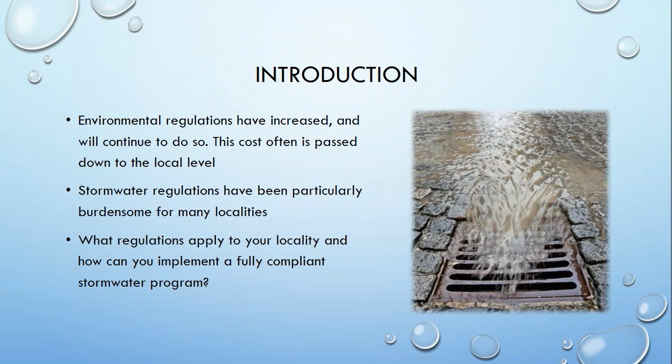So some other discussion topics: we're going to do a high level, 30,000 foot overview of what stormwater is and why we're here. We'll go down into the weeds a little further and talk about the Virginia Stormwater Management Program itself, and then the local VSMP authority requirements that accompany that. We'll spend some time talking about MS4 localities.

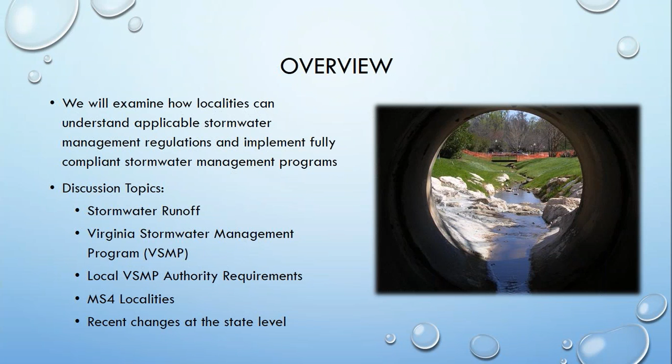MS4 is the Municipal Separate Storm Sewer System, so one M, four S's, and that applies to certain localities, usually based on population. And then we will wrap it up with some of the changes that we're seeing at the state level and some of the challenges that we're facing as we move forward with stormwater management in the state of Virginia.

So what is stormwater runoff? We probably know that the rain falls from the sky, it hits the ground, some of it's absorbed, and what isn't absorbed flows over the ground surface and ends up in our creeks, streams, rivers, lakes, and other waterways that are considered waters of the state, eventually getting to the Chesapeake Bay for most of Virginia, not all of it, and then into the ocean.

So when the runoff does occur and it cannot be absorbed in the ground, we have stormwater runoff that flows over the land, and as it does so, it picks up anything in its way. That includes sediment, sometimes trash, and a variety of pollutants, pet waste, oils, fertilizer, and anything else that may be on the ground, and then carried into the waterways.

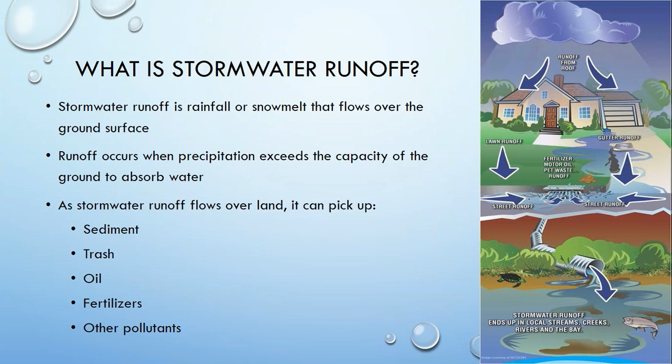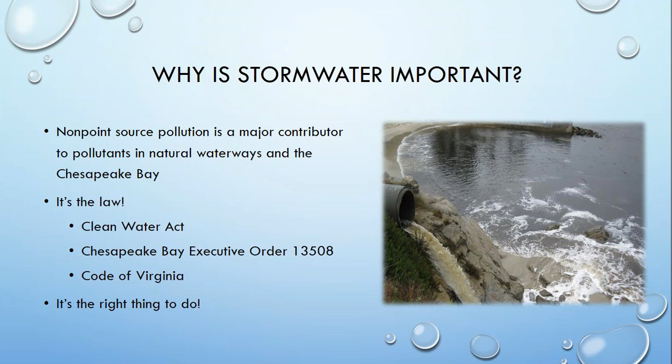The Clean Water Act is in effect. The Chesapeake Bay Executive Order 13508 is in effect, and it is a very significant portion of sections in the Code of Virginia. And then, of course, it's the right thing to do. We want to be good stewards of our environment and leave the world a better place for the next generation. It's important that we are taking care of the resources that we have. And development makes a big impact to that, and that is one of the things we will be spending a fair amount of time talking about today.

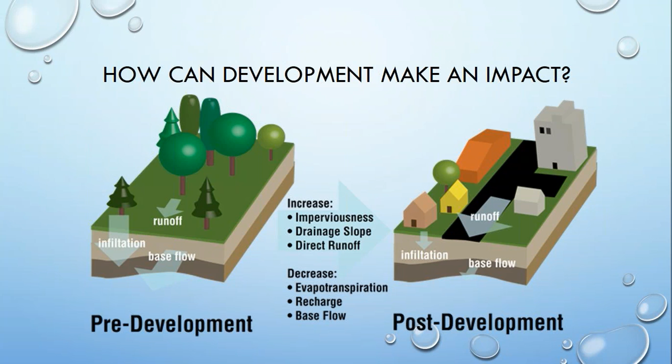I'm going to turn it over to Shana now, and she's going to discuss a little bit about the Virginia Stormwater Management Program. Within Virginia, stormwater is regulated under the Virginia Stormwater Management Program, and the Virginia Department of Environmental Quality is the lead agency that is responsible for developing the statewide stormwater management control programs, and additionally overseeing the implementation of these individual stormwater programs to ensure that they comply with the Stormwater Management Act and the associated Virginia Stormwater Management Program regulations.

And so the overarching goal of this Virginia Stormwater Management Program is focused on ensuring the general health, safety, and welfare of the citizens of the Commonwealth, while also seeking to protect both the quality and quantity of the state's waters from the harm that can result from unmanaged stormwater. And the VSMP program manages stormwater during three critical phases of development.

First, within the pre-construction phase, this is when stormwater management plans are prepared and reviewed to ensure that they meet the technical criteria for water quality and quantity within the stormwater regulations to protect the state surface waters. Additionally, moving into construction is when the erosion and sediment controls and various pollution prevention practices are implemented and routinely inspected and evaluated to ensure that the construction activity is not discharging pollutants to waterways.

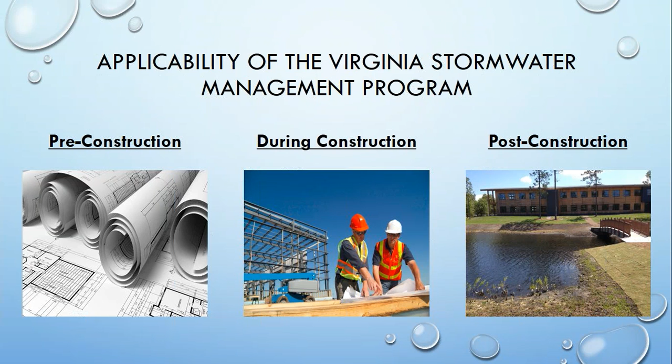Under the VSMP regulations, they set forth water quality and water quantity technical criteria. The water quality criteria establishes that it reduces pollutants carried offsite in stormwater and also sets the threshold for total phosphorus that is allowed to leave in post-construction runoff. And in order to demonstrate compliance with the water quality technical criteria, the applicants are required to use the Virginia

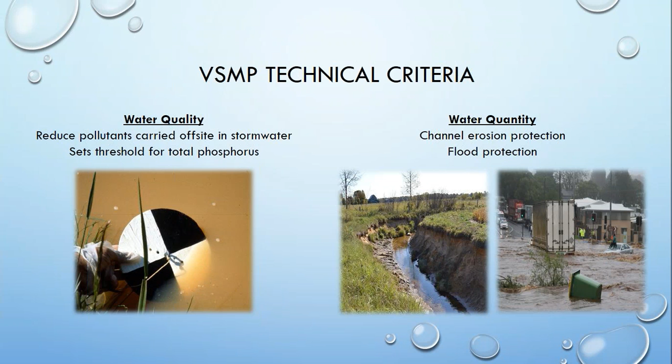runoff reduction method. Additionally, there are criteria for water quantity, and this focuses on ensuring that post-construction runoff peak discharges do not exceed pre-construction peak discharges. And this is to protect the surface waters from channel erosion and also from flooding. And in order to demonstrate compliance with this, stormwater management plans must use the energy balance method and apply the flood protection criterion.

The impact of development can be mitigated through environmental site design and the use of best management practices. Environmental site design uses small-scale stormwater management practices, non-structural techniques, and better site planning to mimic the natural runoff characteristics and minimize the impact on water quality and quantity. Environmental site design focuses on promoting conservation of natural features such as drainage patterns, natural or native soil and vegetation. It also minimizes impervious surfaces, and then implements different practices to help slow down runoff and increase infiltration and evapotranspiration.

Additionally, if a site does not initially meet the technical criteria in the Virginia Stormwater Management Program regulations, the regulations allow for the use of best management practices, and the standards and specifications for these can be found on the Virginia Stormwater BMP Clearinghouse website. These include the 15 non-proprietary BMPs, such as bioretention facilities, permeable pavement, and then they also include some of the proprietary BMPs that have been approved by the Department of Environmental Quality.

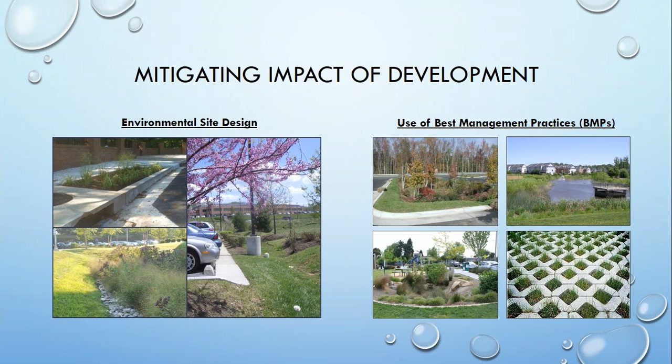So some localities are required to adopt a VSMP, while other entities and localities may choose whether or not they want to adopt the VSMP program. Localities that must adopt a VSMP include those that operate regulated municipal separate storm sewer systems, while non-MS4 localities can choose whether or not they want to adopt a VSMP, as well as state entities, federal entities, and linear projects that are subject to annual standards and specifications.

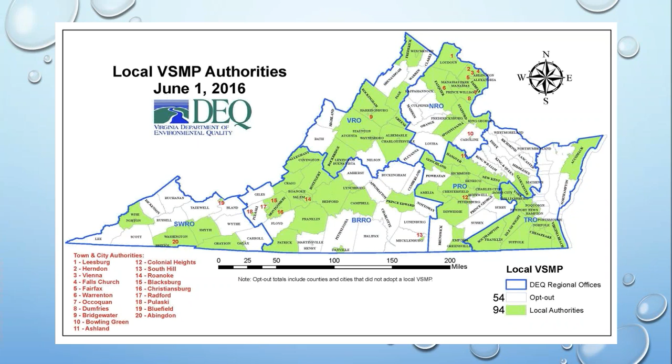The VSMP regulations apply to certain land disturbing activities, and these are land disturbing activities that are greater than or equal to 1 acre, part of a larger plan of development or sale that is greater than or equal to 1 acre, greater than or equal to 2,500 square feet within a locality that has been designated as a Chesapeake Bay preservation area, and then finally a more stringent area that is required by a local ordinance.

And then under the Stormwater Management Act, localities are allowed to implement more stringent stormwater management ordinances, provided that they are based on comprehensive watershed management studies and findings, or determined by the locality to be necessary to address TMDL requirements, prevent further degradation to water resources, address specific pollution concerns, or protect exceptional state waters.

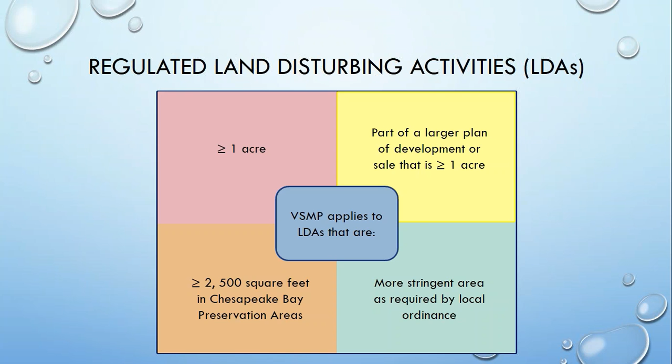And within Virginia, there are 84 localities that are subject to the Chesapeake Bay Act. This applies to localities within Tidewater, Virginia, and includes most of the localities that are east of I-95. One of the major provisions of the Chesapeake Bay Act and regulations is that it requires localities to regulate land disturbing activities that are greater than or equal to 2,500 square feet under an erosion and sediment control and stormwater management program. And so if a locality is designated as a Chesapeake Bay preservation area, it must still regulate land disturbing activities between 2,500 square feet and 1 acre, even if it has not adopted a VSMP program.

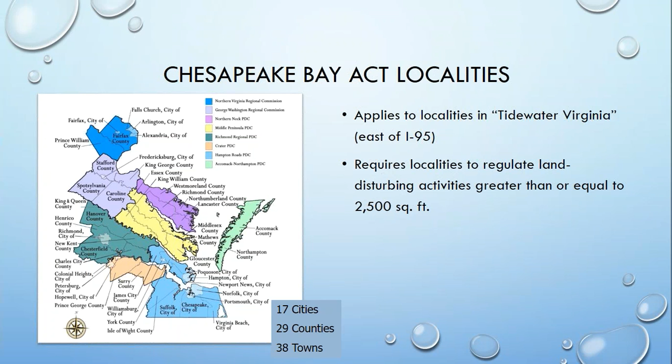So this creates a little bit of a burden for some of the localities in rural Virginia that have opted out of administering a VSMP, because they will still have to perform stormwater management review for activities between 2,500 square feet and 1 acre.

So now we're going to talk just a little bit about administering the VSMP. As Shana had mentioned, there are some localities that have opted out, there are some that have opted in, but we're going to talk a little bit about those that are responsible for administering the VSMP. And beginning July 1st of 2014, all MS4 localities were required to adopt and administer the VSMP, as Shana had mentioned earlier. Non-MS4 localities could elect to adopt a VSMP or have DEQ administer the program. So we're going to focus really on those localities that are administering it themselves.

The locality's program administrator is responsible for administering the VSMP, which includes compliance with local ordinances, and the state has set forth criteria for what needs to be included in those local ordinances, and that sometimes includes things such as accepting registration statements, plan reviews and what that entails, enforcement procedures, and sets forth criminal and civil penalties for not adhering to the stormwater regulations and codes.

The program administrator must also be responsible for permit issuance, construction inspections and enforcement, permit closeout, post-construction inspections, and then retaining the records for those files and those inspections and projects. It's also important to note that VSMP staff have and maintain the required certifications that are required by the state in order to run the VSMP.

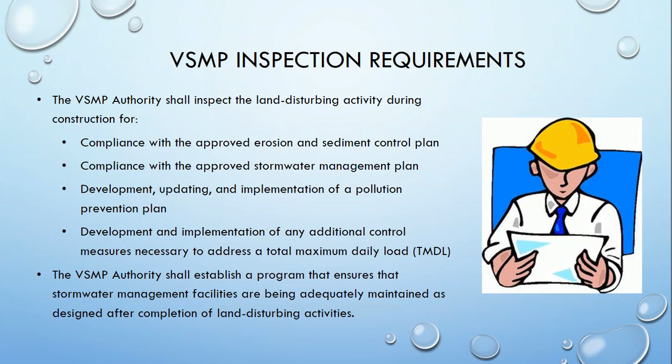So let's talk just a little bit about the review process. Like some of our review processes are, it is a little bit lengthy. So the Stormwater Management Plan is submitted by the applicant to the VSMP authority, and we'll just consider that to be a locality for now. So the locality would have 15 days to determine the completeness and then notify the applicant if it is complete. If it is not, then obviously the plan does not move forward and the Stormwater Management Plan must be resubmitted to meet the completeness requirements.

Once it is complete and been accepted for review, from that cursory review, the locality or the VSMP authority has 60 days from that notification to notify the applicant in writing of any comments and note any deficiencies that may be in the plan. If it doesn't meet those requirements and has to be resubmitted, then the VSMP has 45 days from the date of the resubmission to review and then accordingly respond to the applicant of the nature of any comments to address deficiencies in the plan.

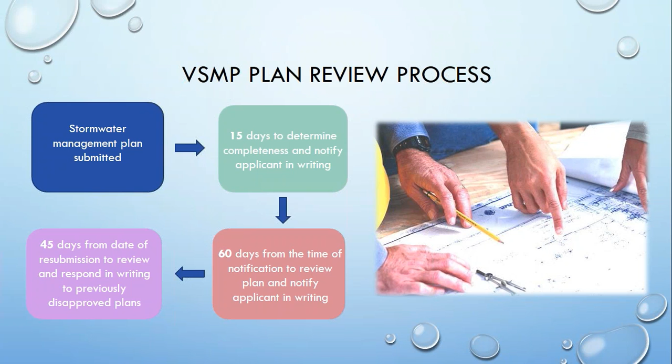Documentation. It's very important that the locality or the VSMP authority have good record keeping to ensure that documents are kept, and there are requirements for that. Project records must be kept for at least 3 years after the state permit is terminated or the project is completed. The stormwater management facility inspection records need to be kept for at least 5 years from the date of inspection. And it's always good, for many reasons, to keep your construction and as-built record drawings maintained in perpetuity, but that is a requirement of the VSMP, or at least until the facility is removed.

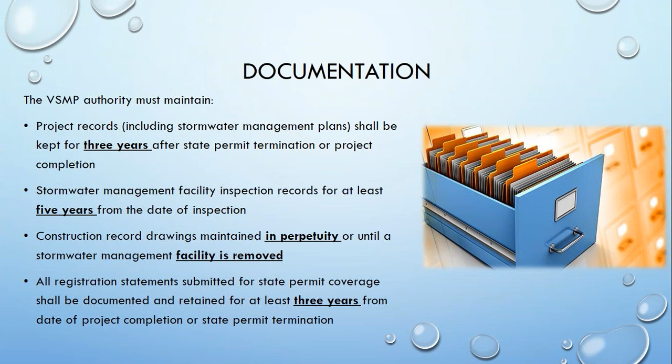So it's always good practice, just a good best management practice, to retain and keep any construction record drawings for any facility in a good filing system. And then all registration statements submitted for state permit coverage need to be documented and retained for at least 3 years. So there's a few nuances here, and it's just good to remember which ones need to be kept for how long, and try to ensure that you have a good filing system so that when you win the lottery and you are no longer employed there, whoever steps in behind you can have a fairly good and easily understood method for how things are filed and stored.

And so reporting requirements: October 1st is usually the big day to get things to DEQ for both MS4s and VSMPs, and that certainly is true here. What the state is looking for from VSMP authorities is to submit information from the previous fiscal year. So for instance, October 1st coming up this year, 2016, they would be looking for information beginning on July 1st of 2015 to June 30th of 2016.

And they would be looking for information on new permanent management facilities that have been installed during that time frame. They would like to know the type of facility, where it is located geographically, the coordinates, the acres treated, and then the surface waters or karst features into which the facility will discharge. They also would like to know if there were any enforcement actions taken during that fiscal year, and follow-up associated with that, and any number of exceptions that might have been granted by the VSMP authority.

And now Shana will talk a little bit about the MS4. So first off, what exactly is an MS4? MS4 stands for Municipal Separate Storm Sewer System, and this is the system that is designed for collecting or conveying stormwater that is owned by a public body and is not part of a combined sewer or publicly owned treatment works. And within Virginia, discharges from MS4s are regulated under the Virginia Stormwater Management Act, the Virginia Stormwater Management Program Permit Regulations, and then also the Federal Clean Water Act.

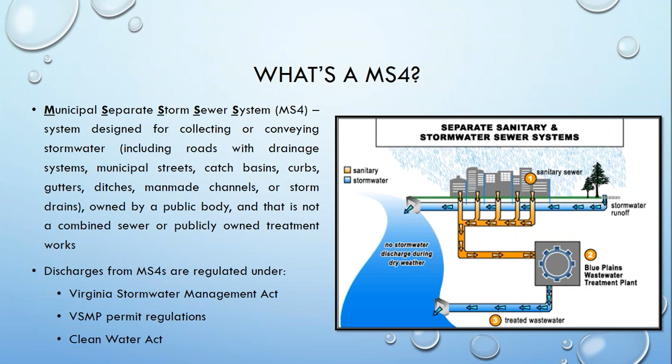MS4 regulations were developed and implemented in 2 phases. The first phase began in the early 1990s, and this required operators of MS4s that served populations greater than 100,000 people per the 1990 decennial census to maintain a permit to discharge stormwater, and these are regulated under individual state stormwater permits. Phase 2 began in 2003, and this applied to operators of small MS4s that were identified as being within urbanized areas by the latest decennial census.

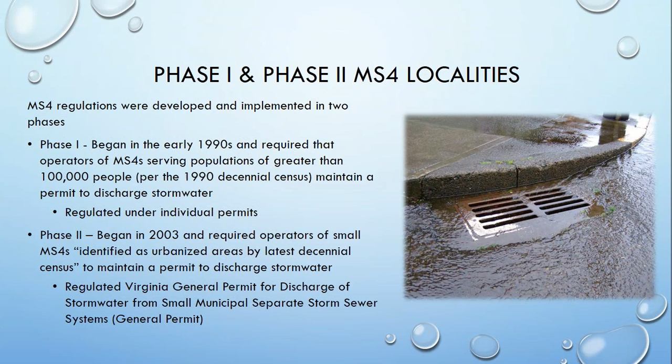And under this classification, small MS4s are required to be regulated by the Virginia General Permit for Discharge of Stormwater from Small Municipal Separate Storm Sewer Systems, known as the General Permit. The General Permit requires permittees to establish a comprehensive stormwater management plan to reduce pollutants to the maximum extent practicable. And this permit is issued and overseen by the Virginia Department of Environmental Quality, and it focuses primarily upon methodologies to reduce non-point source pollution to the maximum extent practicable.

Each MS4 permit lasts for a permit cycle of 5 years. The current permits became effective on July 1st, 2013, and will run through June 30th, 2018, when a new permit is likely to come into effect. In addition to establishing the different components and tasks that must be developed and implemented, the permit also establishes the timeline for developing the MS4 program.

There are also some reporting requirements. Permittees must submit a program plan and annual reports to DEQ. The program plan outlines the different best management practices that the locality will implement to meet the permit requirements over the 5-year permit cycle. And this program plan must be evaluated annually and updated as necessary to ensure that the permit requirements are being met.

Additionally, the permittee must submit annual reports to DEQ, which are due by October 1st each year. And these annual reports describe the activities that took place during the reporting year, also detail the activities that will take place during the following reporting year, and then finally include an evaluation of the different best management practices that the locality has implemented.

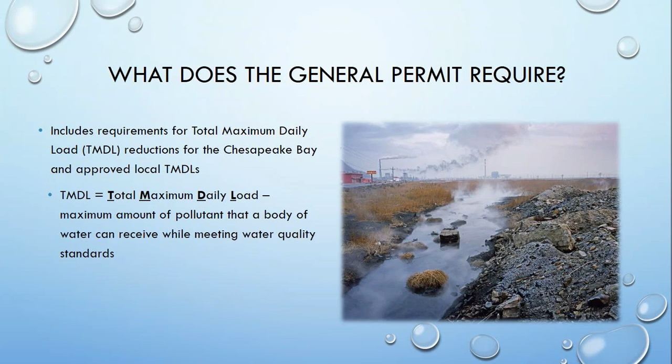The U.S. Environmental Protection Agency approved the Chesapeake Bay TMDL in 2010, and this TMDL focuses on the pollutants of concern, which are nitrogen, phosphorus, and sediment. Within Virginia, they've established the Watershed Implementation Plan that allows up to 3 MS4 permit cycles to meet the TMDL reduction requirements. So in this permit cycle, which currently runs from 2013 to 2018, permittees are required to attain a 5% reduction in nitrogen, phosphorus, and sediment loads.

In the next permit cycle, which will run from 2018 to 2023, permittees must meet an additional anticipated 35% reduction in these loads. And then finally, in the third permit cycle, which will run from 2023 to 2028, permittees must implement practices to meet an additional anticipated 20% reduction. So in total, over these 3 permit cycles, this is going to be a 60% reduction in a locality's nitrogen, phosphorus, and sediment loads.

So within the MS4 permit, they have the requirement for the permittee to develop an action plan to demonstrate how they will meet the pollutant reduction targets. So they will quantify their current loads and the required reductions, and then also detail the best management practices that they will implement to meet the reduction requirement for that permit cycle. And then additionally, the Phase 3 watershed implementation plan is currently in draft and is expected to come out in 2018, and this may result in some changes to the pollution reduction targets. So we might be seeing a change in the next permit.

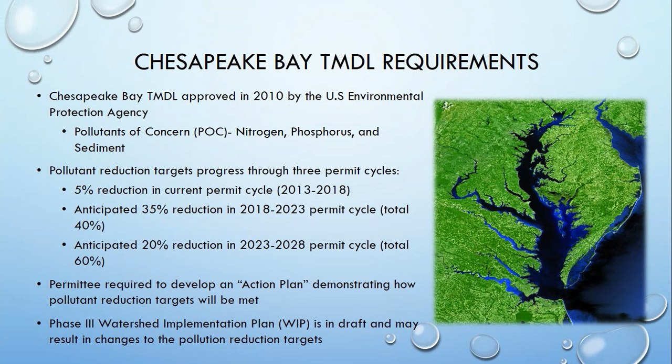The MS4 permit also requires a locality to develop action plans for applicable local TMDLs. The current permit requires these action plans to be developed if a locality has a waste load allocation for a TMDL that was approved before July 1st, 2013. Under this requirement, the permittee must evaluate the source of the pollutant and then develop and implement an action plan that details the best management practices to meet their assigned waste load allocation. And then finally, they must develop a process for evaluating whether or not the practices they implement will meet their assigned waste load allocations.

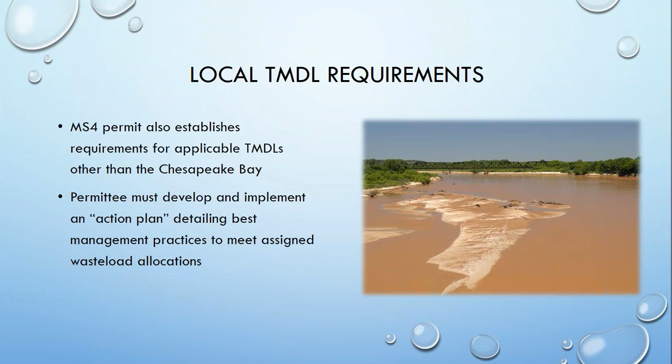Finally, the MS4 permit establishes 6 minimum control measures, which must be incorporated into the MS4 program. These include public education and outreach, public involvement and participation, illicit discharge detection and elimination, construction site stormwater runoff control, post-construction stormwater management, and finally pollution prevention and good housekeeping for municipal operations. Under each of these MCMs, there are various tasks and programs that must be implemented, such as public education outreach programs, employee training, and outfall screening. These have to be implemented into the permittee's MS4 program plan and continuously evaluated to ensure that the locality is meeting the requirements of the MS4 permit.

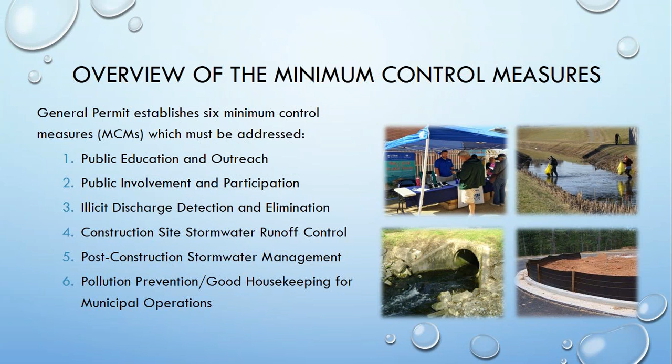All right, so we're going to talk a little bit about some of the challenges that we're facing here in local government. That's kind of what our background is. We work for a number of local governments throughout the Commonwealth, and that's what our background is when we were working for staff. So we're sensitive to the needs and the challenges that local governments are facing when it comes to both the VSMP and the MS4 programs. And we recognize that both are very complex and very expensive programs to administer, and with things facing us in future permit cycles, particularly for our MS4 partners and friends, those are some big challenges on the road ahead.

So many localities are obviously finding it difficult to create fully compliant stormwater management programs. Some localities simply do not have the resources to develop the programs and then administer them as they should be. There's a lot of stuff going on. We're all very busy, and it's very tough when you're in the trenches trying to put fires out all day working for local government wearing a million different hats, keeping your eye on the ball as best as we can and trying to make sure we're meeting these requirements and deadlines that the state has set forth. So it's a resource challenge from a time standpoint, but also from a financial standpoint, not having the staff positions available for many partners to really dedicate time to focusing on stormwater management programs from the administration perspective.

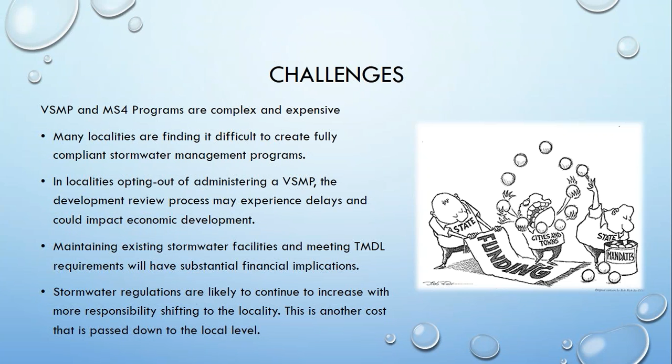So these are obviously going to continue to grow, and more responsibility is most likely going to continue to be placed on the shoulders of local government partners, and that just seems to be the way that things are shaping up for stormwater, as well as many other programs that historically had been funded or financed by the state. So just some challenging times for localities in terms of stormwater, and we are still seeing some state level changes as well, and these will obviously continue to occur as time goes on.

There was a stakeholder advisory group that was convened in 2015, and it was comprised of 21 or 22 individuals that represented local governments, the development community and environmental groups. And they met a number of times throughout the course of the year, really with the task of looking at how these different stormwater regulations that overlap, but yet are still kind of standalone, compare when they're side by side. Where are there conflicts? Where are there opportunities for streamlining? Really looking at the Virginia Stormwater Management Act, the Erosion and Sediment Control Law, and the Chesapeake Bay Preservation Act, trying to set them side by side, see where overlap occurs and where some conflicts are, and try to streamline that process.

So what came out of the SAG last year was Senate Bill 673 and House Bill 1250, which was passed during this 2016 General Assembly session, and it established the Virginia Erosion and Stormwater Management Program, the VESMP, and non-MS4s can choose to opt in, opt out, or opt in light. Some of these are pretty straightforward. You opt in, the non-MS4 locality is going to administer the VSMP.